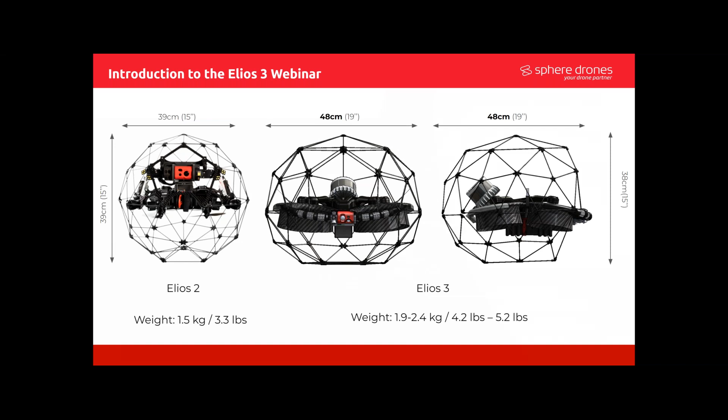They've revised the propulsion system on the Elios 3, so it's low noise now at 88 decibels, meaning you can actually fly it with a little bit less discomfort. If anyone's flown the Elios 2 before, it is quite a noisy little unit. The ducted motors there are a little bit more effective and efficient, and they've kind of changed the tone of the motors - they're a little bit less invasive.

It's made for the toughest indoor environments, so it's water and dust proof. I'll touch on that one a little bit later as well.

They've designed it to IP44 standards. They haven't got the certification on that one yet because it takes time, and it's obviously a very newly released product, but they've advised it as water and dust proof to IP44. Collision tolerant up to 2 meters a second, and then they've got a patent pending controller for collision recovery.

It's actually quite impressive when you see it. You can fly into something, and because it's got reversible thrust, like it's got the ability to reverse its thrust on the motors, it can actually hold its position very stably when it's on an angle, and it can also recover very well. So that's a really important function on the Elios 3, or the Elios lineup I should say.

And then the front payload, we're all relatively familiar with the 4K payload. They have improved the lighting here, so we are looking at up to 16,000 lumens now, which is kind of crazy, but 10,000 lumens is the standard maximum brightness, and then if you want to go to that 16,000 lumens, you just have to click the boost button.

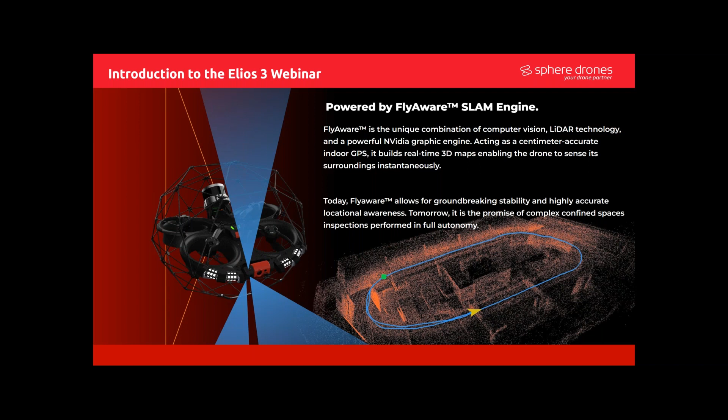So today, FlyAware allows for groundbreaking stability and highly accurate locational awareness, but tomorrow it's the promise of complex confined space inspections performed in full autonomy. I expect the rollout of that will probably be staged - first, something like returning to home, flying back the way it came. But I think the future state, it'll probably be something where it can redo the flight that it did last time based on waypoints, or maybe autonomously exploring an environment. So I'm really excited to see how the Flyability team goes with that.

One of the big benefits of the Elios 3 is it's just so stable in its operating environment. They've got a new SLAM-based stabilization algorithm that catches the tiniest unpredictable movements of the drone and instructs the flight controller to compensate for it. So it allows the drone to float in the air, still as a stone, even in the toughest conditions.

This means you really can put this in the hands of someone who's not particularly experienced or capable from a piloting perspective, and have them feel a lot more comfortable and confident with the operation of the drone. Then it just becomes a matter of them being there to ensure that the data quality is good and that the drone's safe in the event of an incident.

So you can see here the red field of view is actually the field of view of the LiDAR unit. It scans upwards, forwards, backwards and down. You just need to make sure that when you're flying around in a space, to get good quality data, you try and ensure that your LiDAR field of view covers the area correctly. Then, of course, you can see the 3 fields of view of the vision sensors on the front there. With the previous generation, they had a sensor on each corner for the Elios 2, and they've gone to only the front mounted sensors, which look upwards, forwards, and downwards for their vision positioning on this one.

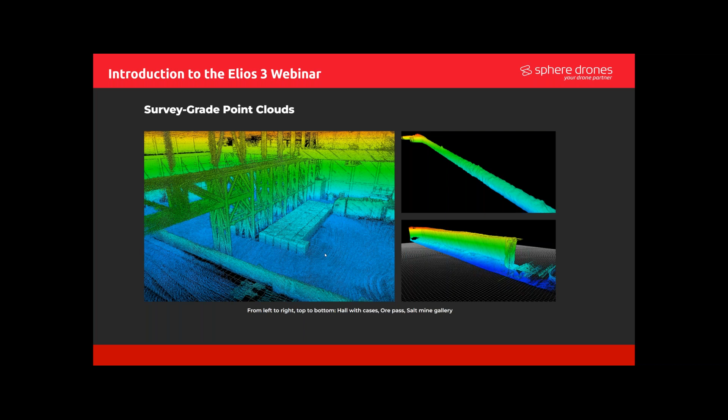Being able to operate the drone in these sorts of tight spaces is quite an important capability, and having that high grade data is the next generation of data gathering, I suppose.

The flyability Elios 1 is a perfect example of that, where you can fly it into really tight spaces and capture information about specific points of interest.

But the Elios 2 took that to the next level by being able to gather better quality data with the camera not being obstructed by the cage.

That meant you had visual data available from an RGB camera perspective. And then being able to take a LiDAR unit through that same environment and combine the two is just next level.

So the Elios 3 is able to be operated outdoors, but you do need to be mindful that the wind resistance of the unit is not particularly high. So you do need to be careful of the operating environments that you're flying in.

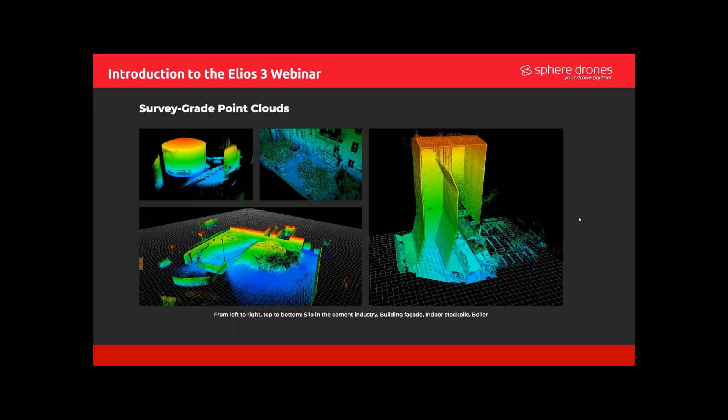One thing with the Elios 2 was that it only used the visual positioning system for stability with its cameras and lasers. But with the LiDAR unit on the back, you'll see a bit more stability with the Elios 3, even in outdoor environments that are brightly lit. I know some of you are already operating the Elios 2 and may have seen the stability be affected by bright lighting, etc. So that's kind of gone away a little bit, which is pretty nice.

Stockpile volume monitoring - being able to actually operate a drone inside a confined space like this and quantify the actual volumes of your stockpiles with good accuracy is, I think, a bit of a game changer. We had a few registrations from people in the mining sector. Being able to quantify that information is particularly useful, and I think there's also real potential for agricultural or chemical environments as well.

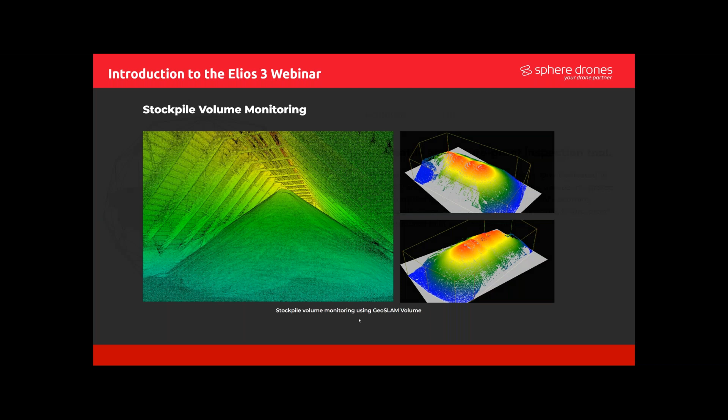In terms of the Elios 3, the previous workflow for the Flyability product was that they had the Elios 1, then they obviously improved the unit exponentially in the jump up to the Elios 2. Being able to remove the camera from inside the cage completely meant that you had a much better field of view and much better data quality.

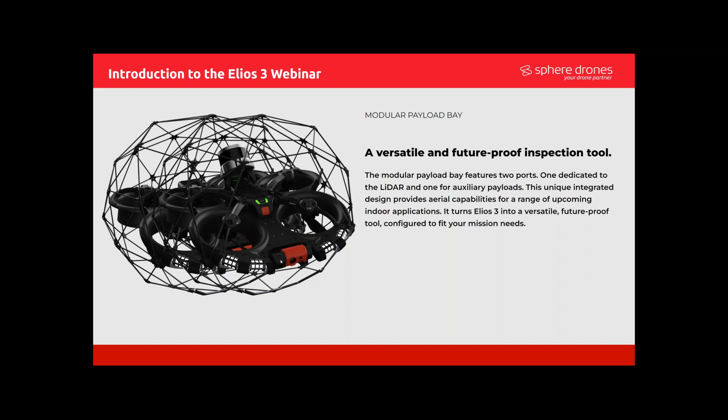That's an example of some mounting points for future modular payloads. There's also a couple just above that heatsink, next to the green light, and then obviously there's the LiDAR unit on the back. Depending on the payloads offered by Flyability, you'll be able to use some other pretty impressive pieces of technology to gather better data as well.

On the back there, you've got the LiDAR port on the left, but there's also an auxiliary port. So future state will see some things like gas detection, non-destructive testing, or radiation detection units, etc. It's pretty exciting that they're going to allow and support those extra products.

Like I said before, the IP44 design is not certified at the moment, but it is designed to comply with that rating. I think the previous generation, the Elios 2, might have had an IP43 rating. So they've improved it slightly more, but obviously it's not something that you want to submerge - it's not waterproof. But it's nice to know that if it does get a little bit of a splash on it, then you don't have to worry quite so much.

Similarly to the Elios 2, where you could flip back over if it found itself upside down, the Elios 3 does retain that capability, which is pretty convenient. You obviously lose a little bit of height in the process, but it does mean that if you have an impact with something that flips you upside down, and the motors don't manage to compensate for it for whatever reason, it gives you that option to right yourself, which is pretty convenient.

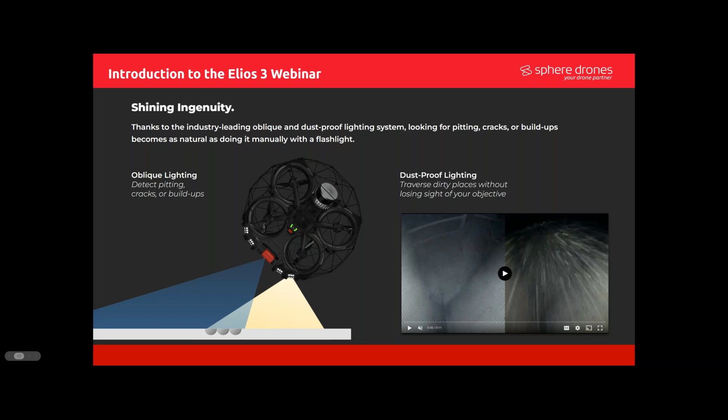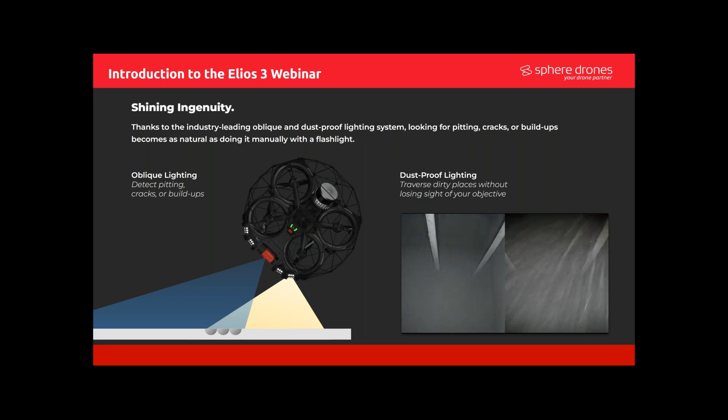On the right-hand side there, you might have seen that the dust-proof lighting allows you to navigate more easily in a dusty environment. Similar to having your high beams on in a foggy morning, if you turn your dust-proof lighting off, it's like dipping your headlights or putting your fog lights on from a navigation perspective.

But you do also have that LiDAR unit, which really helps the capability of navigation and situational awareness in a space.

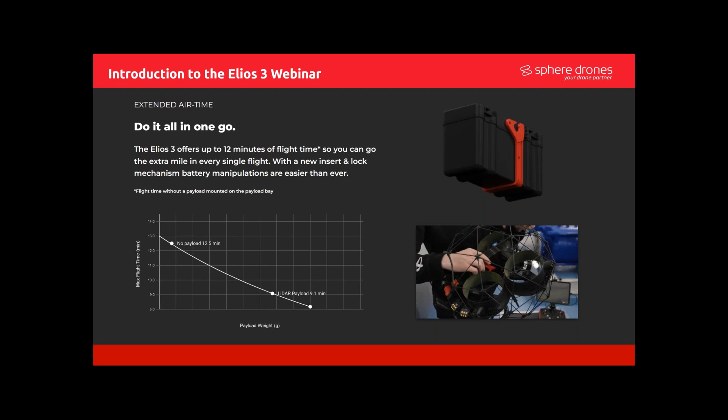In terms of air time, like I said before, you do see a slight improvement in flight time. If you're not using the LiDAR unit, you get up to 12.5 minutes, and with a LiDAR unit, you're getting about 9.1 minutes of flight time as a ballpark.

You do, of course, need to be mindful not to push your flight times too much, because you can damage the batteries if you run them down too low.

One thing we have to discuss with clients new to the Flyability products is that flight times are something that is often overvalued, if that makes sense.

There's no debate that having the longest flight time in the world would be incredibly valuable, but Flyability has tried to manage that balance of giving enough flight time to be practical in a space, while also allowing you to carry the batteries on a passenger aircraft, since they're under 99 watt hours, which is nice. But also, the heavier the battery is, the more power it takes to lift it. So trying to keep that payload capability, they've opted for that particular battery size.

It may be something where in future state we do see revised or larger batteries come to the table, but I don't want to speculate on that too much at the moment.

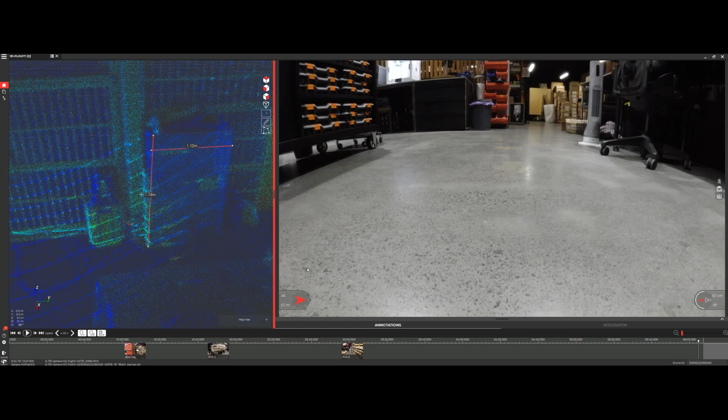You can see that essentially, once we've flown in that space - I'll skip ahead here - I fly upstairs and into the office environment. So once one goes and covers the area, you go back and land roughly in the location you took off from, with the field of view you took off from.

And then you have the model on the left-hand side here, being generated in flight. I can turn on the trajectory and you'll be able to see the flight path I took. You can see there's a figure of 8, a 360-degree spin done just to calibrate the data a little better. But the quality of the model created here is quite impressive to me.

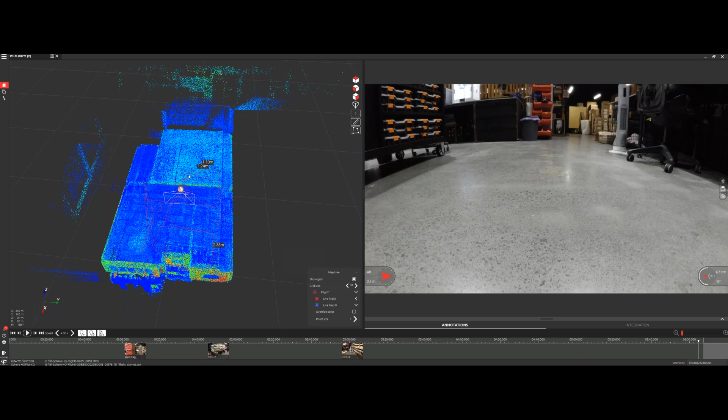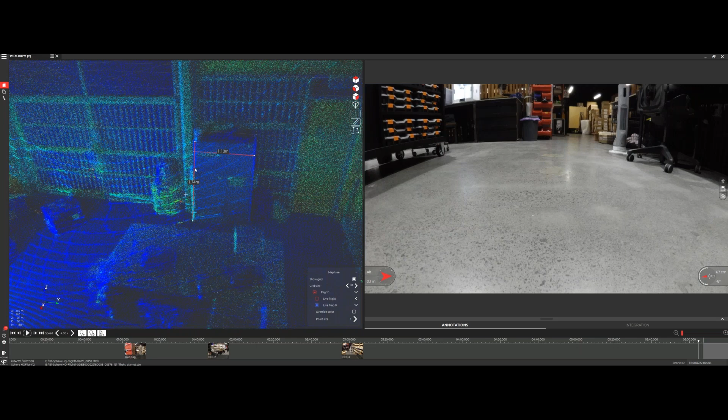So you can actually see here, this is a battery charging locker, so it has a dangerous goods box. When I pulled up the specifications for that box online, I was able to see that the width was 1.1 meters, and it was 1.3 meters tall. So you can see here that I may have grabbed the point just to one side of the measurement - that's quite an impressive capability, given this is the unrefined plus or minus 10 centimeter accuracy. But we're still seeing very, very good quality data.

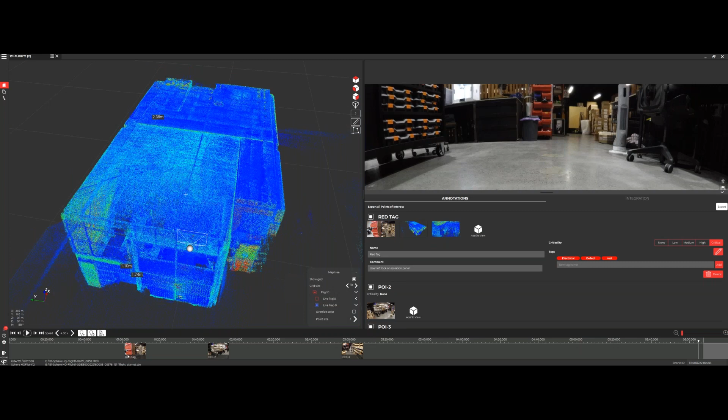In terms of the workflow here, you can add these points of interest - you can add this 3D view to your points of interest on the right-hand side. For example, if we go to this red tag, I was looking at this point, and you can see I've added the field of view of going to that point of interest. You can contextualize the data a lot more by adding different views and things, and you can also add tags, keywords, etc.

From here you can also click to export a flight report, which allows you to very quickly and easily take all of these points of interest you've added and export them into a Word document, which you can then modify and add your own watermarks or whatever you like. It's a one-button press mentality there, which is really neat.

You can also go and export the data for GeoSlam so that you can create a more robust data set in there, refining that data from the 10 centimeters down to the plus or minus 2 centimeters they were referring to.

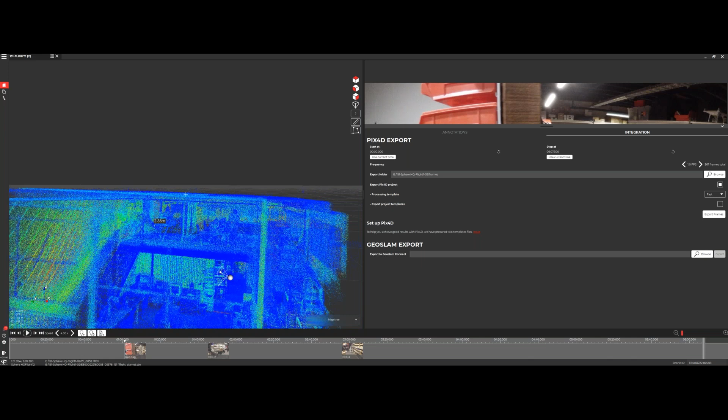I can see Hayden's asked about the number of cycles - I think we've answered that one in terms of the 50 cycles. However, it may be something where there's the option of using those batteries for training purposes or something like that, where maybe you don't have a high risk environment.

In terms of the LiDAR, I've got one here that says: does the LiDAR scan continue to add to the model flight to flight, and can you add to build the model as you progress through the job? Thanks for that one, Simon. Essentially the short answer is that, from a capture perspective, it's on a flight-by-flight basis.

If you wanted to, say you had a long tunnel - you just need to make sure that if you flew 100 meters into the tunnel and then wanted to come home and fly the 100 to 200 meter section, you'd need enough overlap between flight 1 and flight 2 so you can merge them in third-party software after the fact. So I hope that answers your question.

Someone's commented here on the fire investigation once the IP rating happens. So in terms of the IP rating, we'll keep you posted about how things go with the IP rating and whether that's something that they've got.